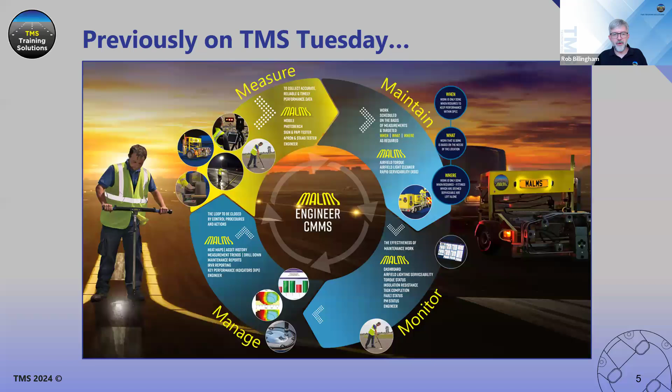Okay, so today, and last time we looked at a lot of the aspects of a CMMS, from runway testing, PMs, maintenance, all that sort of thing. Today we're going to focus on the workshop system and how the CMMS helps there, and how we track assets through from the runway through the workshop system, and how we manage assets and stock levels and repairs and things like that.

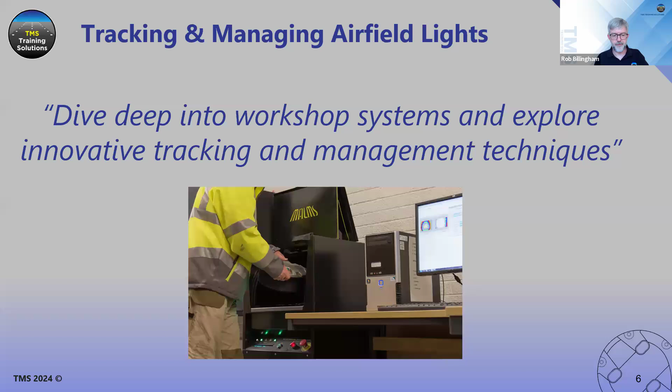Okay, so we're going to look at tagging and warranties. All assets have a warranty period, and that needs to be managed. We also look at the data we collect to determine mean time to failure of assets, and whether they're lasting the expected amount of time. So we need to maximize the efficiency and reliability of our assets. We need to track them with tagging, and we need to monitor our warranties. And then we need to look at stock, all to minimize downtime and ensure a smooth operation of our airfield.

Okay, so how do we identify lights? How do we track them? On the runway itself, one way is to use tags buried in the ground, so we use glass tags. They're called RFID tags, and we bury them about 50 millimeters down under the tarmac.

Usually we decide on a particular side of the asset to place them, and we'd like to put them all on the same side as we go along down the runway. We usually recommend placing them at 75 millimeters from the asset itself, and burying them at 50 mil deep. That is fine for reading with our wand reader and our torque wrench.

So once we've installed the tag, we drill a hole, pop it in the ground, and fill it with resin mortar. We'd use our RFID hand reader to test that the tag is working. Then at some point we'll come along with a tablet PC and a reader, and we'll associate all of those assets into the system. So the RFID tags and the locations all go into the database.

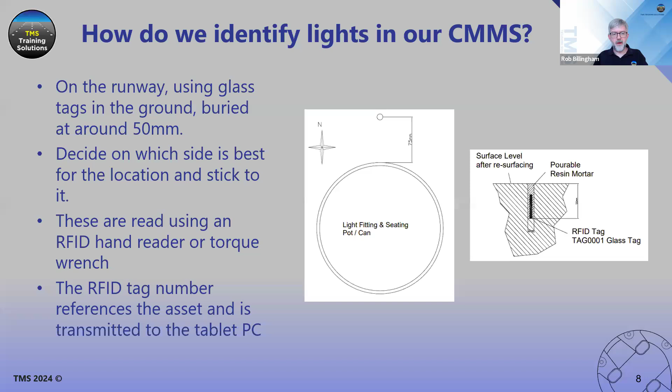As an alternative to RFID tags, we could use GPS, which has its own advantages and disadvantages. Global positioning systems have been around for quite some time; we all know it from our sat navs. Here we're using GPS on a tablet or maybe a phone running an app, and it gives us an accuracy of about 4.9 meters, or 16 feet.

The downside is it can be blocked by buildings, though that's not usually a problem in the airfield because it's a nice open space. You can have problems with atmospheric conditions, so thunderstorms and things can cause issues, and also the design and quality of the receiver itself. If it's a cheap phone or tablet PC, it may not have as good a receiver, which can mean the 4.9 meters is a lot further out.

And it's often the case with runway lights that, especially inset fittings close to taxiway junctions, lead-ons and lead-offs, where lights are closer together than 4.9 meters, just using GPS alone would not identify which one we're standing by.

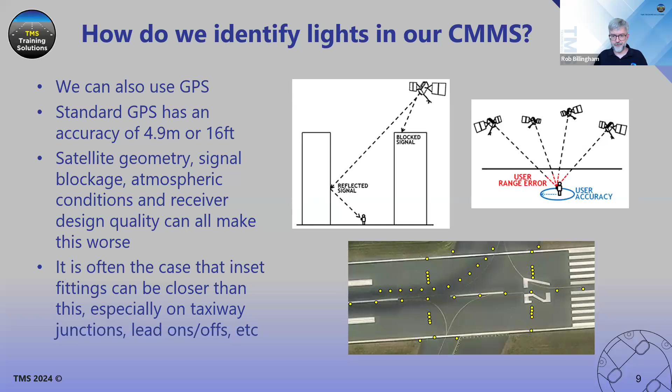So we have an improvement to that, something called RTK, real-time kinematics. This can give us centimeter accuracy, and this is a new development for us. What you have is a base station somewhere on the airfield, which is a surveyed location, so we know its exact position. It's connected to the internet.

Then you have your device in the field, your tablet PC, connecting to GPS as it does normally, also connecting to this base station over the internet. It's a secure private connection just for your airport, your base station. No one else can use it.

The RTK modules in the field are called rovers, so it could be in a vehicle or connected to a tablet PC with an engineer walking around. And we get a correction from the base station, so that corrects the GPS from the satellites down to centimeter accuracy.

It knows exactly where you are on the runway with triangulation, and it corrects that GPS signal. So that could pinpoint which light we're actually standing by, but there still are advantages to actually having a physical tag in the runway too, as it categorically identifies which lamp we are at.

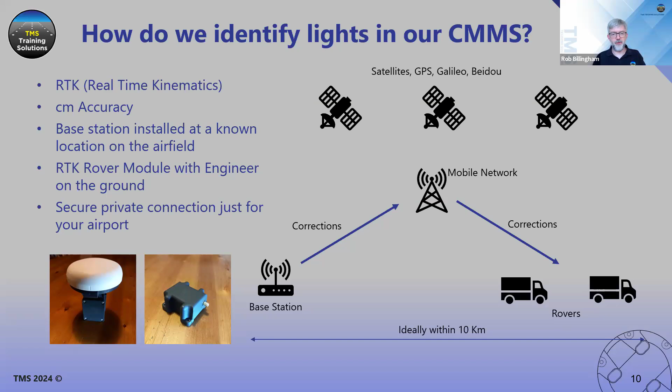Our workshop testers have an RFID scanner mounted inside them, so when you come to do a test, you simply have to scan the tag. The system knows exactly which fitting you're testing. You don't need to enter a serial number or look through drop-down boxes on the software. The software will know which lamp you're testing and what the setup of that lamp should be, whether it's a red-white or a red-red, and it knows all the parameters we need to test against. So it speeds up testing and accurately tracks the fitting through our system.

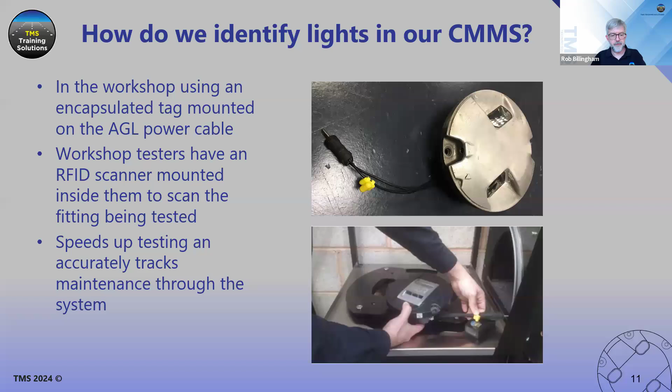But the problem with QR codes or barcodes is they could become damaged over time and unreadable. So fitting the RFID tag to the cable does have a huge advantage.

When we first commission our CMMS, we need a lot of information about the assets themselves, including where they are. This information is usually specified to whoever's commissioned, whichever company's commissioned the system, and the information could be taken from an existing airport asset management system. So it may be just a dump of assets from that system.

Assets are generally split up into areas and zones, so at this time we group the assets into areas and zones. An asset needs to have a photometric type - what sort of light should be at this location. The can itself has specifications, what size light can fit in it, what bolts the fitting itself has for torquing.

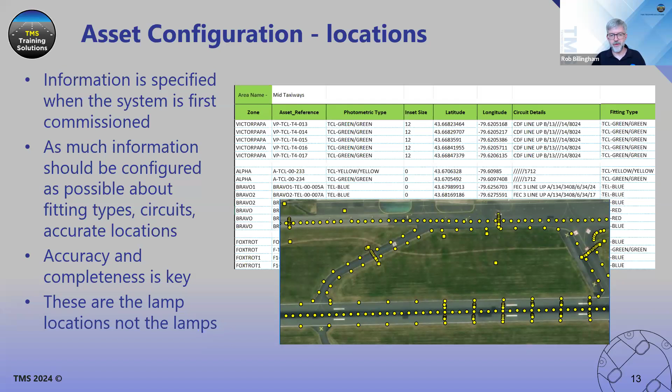Then the lamps themselves, in the workshop system. All lamps have a manufacturer and a fitting type. Is it a centerline light? Is it a taxiway, TDZ?

During commissioning of the system, we need to set up all of this information along with a lot of parameters about this lamp type, which usually come from the manufacturer specifications and documentation. Things like the elevation, the azimuth we'd expect to find when we test them, and what error values we can allow within those parameters. Fitting height, beam width, and of course the all-important candela. What's the standard we're expecting if we test this fitting in the workshop tester?

So all this information, when we configure individual fittings, we specify the manufacturer, fitting type, serial number, then the all-important RFID tag. We should know that, so the tag is fitted on the cable. The color of the lamp, is it white, red?

Then we could look at warranty information. This may be important later if we're looking at mean time to failure. The warranty might be that when you buy the fittings, they're in their boxes and their warranty is running down on the shelf, and you've got 3 years warranty. Or it might be that the manufacturer allows you to have a warranty from the day you first use them. So we need to record that within our system - a first use date and that warranty period, 2 years, 3 years - then we can use that to figure out the date of expiry.

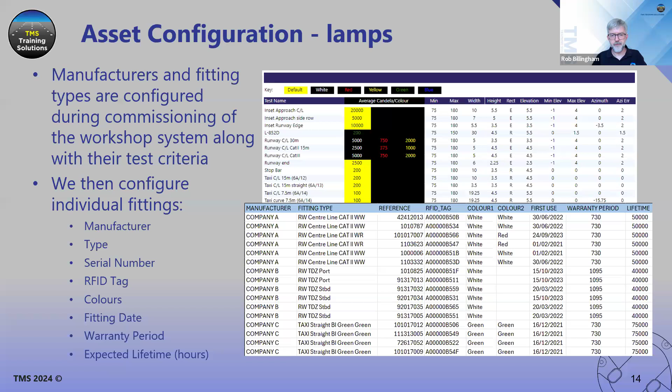So data quality is crucial. Data quality is an assessment of whether the data is fit for purpose in the particular context we're using it. If we want to perform some analytics or AI, we must have good data to start with.

All of that configuration data must be correct and complete. It's no good just saying manufacturer unknown, we'll fill it in later. We need to put all these details in from the beginning, so we start collecting a good amount of quality data. In the future we're going to want to analyze that data, and if we run it through AI, it's got to be good from the beginning. There's an old saying in computing going back to the 50s or 60s: garbage in, garbage out. So what you put in has got to be right if you're expecting decent results out of the system.

So there are 5 traits with the data that apply. It's got to be accurate - all those lat longs must be correct, your test criteria must be correct as documented, all those parameters must be set up correctly. It must be complete - you can't fill in some of it later and leave the rest blank.

Reliability - does it contradict other sources of information, such as the airport's asset management system or GIS system? And is all the data relevant? If you're given a survey to complete, yes it's all relevant, you've been asked for it, but maybe your asset IDs are 20 characters long - do they need to be? Is all of the information in that field actually needed, or are you overcomplicating it?

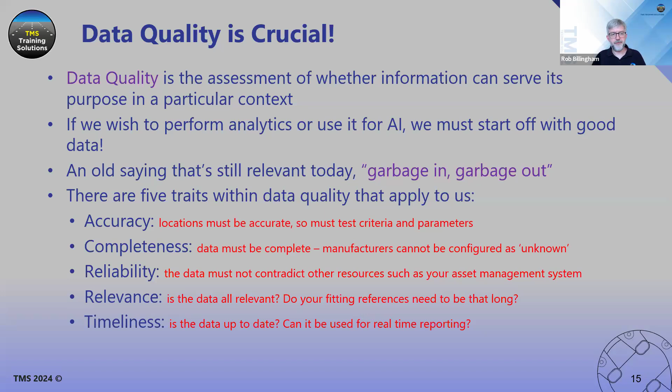Okay, so let's talk about tracking lamps through the workshop system. We've already talked about the location of fittings on the runway. The lamps themselves are either in one of 3 places: actually fitted in the runway, in stock on the shelf waiting to go out if needed, or in the workshop being repaired.

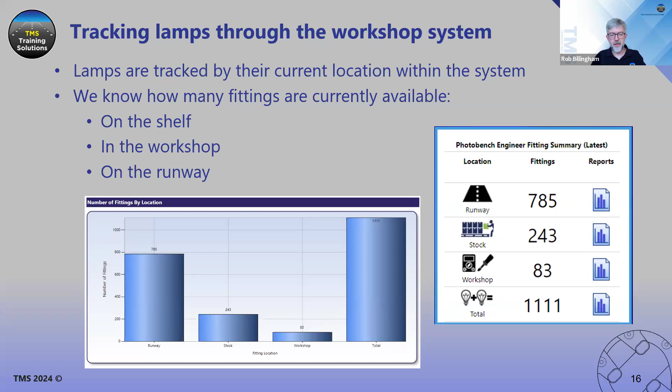If they're in the workshop being repaired, we'd like to get them repaired as quickly as possible and onto the shelf so they're useful in case they're needed. On our dashboard, we can have a panel where we track how many we've got in stock at each of these locations, producing a simple bar chart of where things are. If we click on one of those bars, we can drill down into that location and see by fitting type how many we've got.

So how many AGL headlights are on the shelf or in the workshop? It's all information we need to know, and we know that information because we track it through the workshop system and the MALMS Engineer system using the RFID tags.

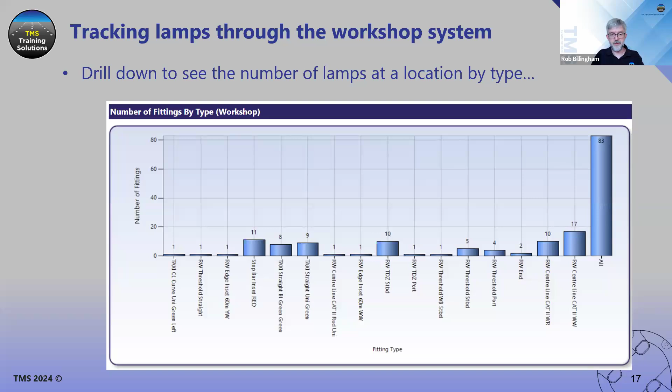So how do we track this? To figure out where a light is, we need to use both tags. If it's in the runway, we scan the fitting and we scan the location, and they're paired together, so we can track it and know where it is in the runway, and what area and zone within MALMS Engineer it exists in.

If it's in stock, it's for one of two reasons: it's come back out of the runway for some reason and been placed into stock, or it's been repaired and placed into stock. If something comes out of the runway, it goes into stock, but then it's quickly moved into the workshop if it's got a problem, where it's tested, and we can use that test result to analyze the issues. So it's important to test as soon as it's removed from the runway.

So this report here is an audit of a single fitting, and we're looking at its history. It starts by being removed from the runway, so it's in stock. It goes into the workshop, it's had a test on one side, then that's fine, so we move it back into stock. Then we install it on the runway, and sometime later its LED driver fails.

So we're back into the workshop again. We tested it to prove that's the issue, we've done some remedial work, and that's been recorded as to what we've done to it. Back into stock again, and then back out onto the runway.

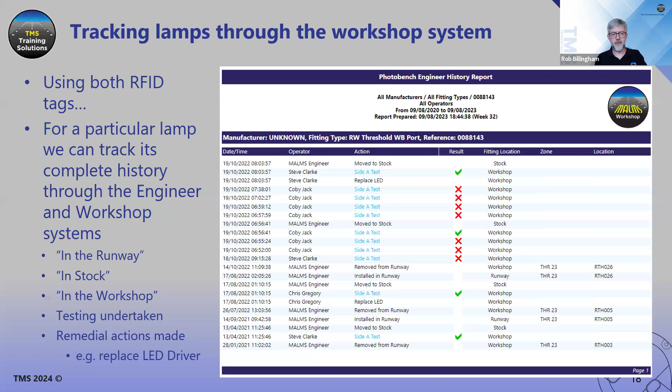Okay, so let's look at the best practices for documenting maintenance to give us that accountability and traceability.

So how do we remove a fitting from the runway then? We're going to use MALMS Engineer for that. We know where the fault is because it's marked on the map. We locate the fitting, drive there, and we scan the tag of the fitting at the location.

Then we select Do Action. This is within the MALMS Engineer tablet software. We select Replace AGL, we fetch that fitting out. Then that fitting, as far as the system is concerned, is gone into stock for now. Then we can replace it with one that we know is good, which we just brought with us.

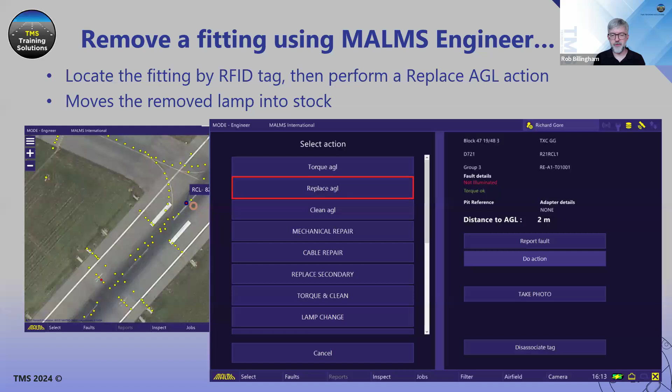As I said, when things come into the workshop, we must always test them initially. So we're going to test twice: before and after repair, and maybe during if we've got an ongoing issue and we need another test in between to help us.

So all the tests we do on a particular fitting are audited, and we can search this audit by fitting type or by date, and we can see who's done the work and the reasons for failure or the reason for pass.

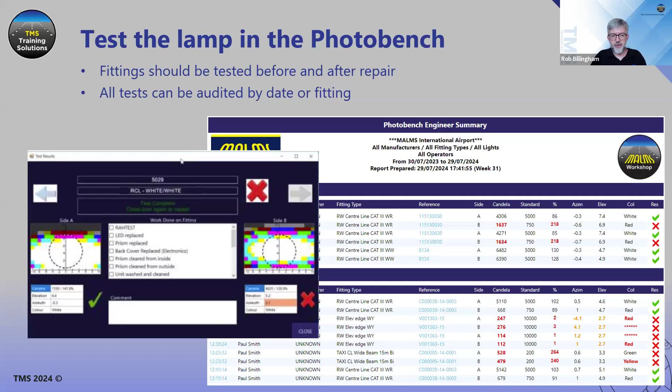In the workshop tester software itself, we get some Isocandela pictures, and we've got the ability there to record any remedial work that's done. We can tick whether the LED's been replaced, or the prism, or the cable, or the unit's been aligned or cleaned. We can record what action's been taken. We can also make some comment in a freeform entry box, and all of this information comes through into the dashboard reporting.

So we've done our test. Isocandela diagrams are a tool we have to help us diagnose the issue. In webinar 42, we went into this in some detail for photometric testing, and it's exactly the same for the photo bench. The diagrams are in far more detail, at much higher resolution, but we've got all the same tools there to analyse the Isocandelas.

We can add guides to the images. We can enhance them, we can change them so we can enhance the darker areas.

So this particular fitting we're looking at, the actual LED driver, the actual LED itself could well be upside down on the B side, because you've got all the light pointing up to the top. We're expecting the light to fill the circle or the ellipse as it is on other fittings, so we can see the alignment is out in this case. So that's a fail, and we've got a figure there, the elevation achieved.

We've also failed on candela as well, on intensity, because the brightest part of the beam isn't within the ellipse.

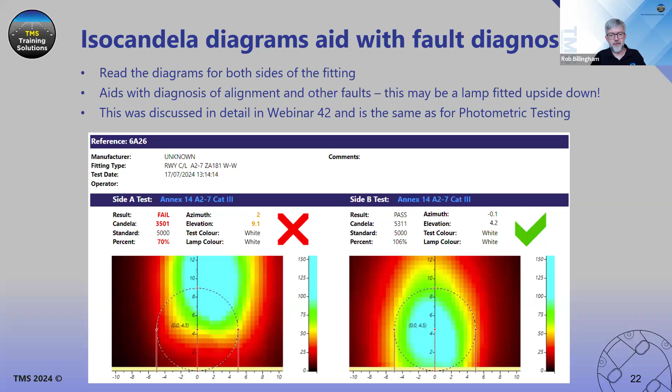Remedial actions taken during repair are recorded during our testing, and come into the PhotoBench Engineer software and through to the database, where we can make additional comments. In the dashboard reporting, we can then track how many actions have been taken, how many fittings have needed a replacement prism, how many have needed cleaning, how many have been scrapped and had an entirely new fitting.

We can track faults and look for epidemic failure, or ongoing issues with a particular type of fitting. All of these reports can be filtered by manufacturer and type, so we can look for patterns of ongoing failure and address those.

It's also possible to interface the system with the stock management system, so we can track the spare parts you're using - how many prisms you've got in stock, how many cables, how many LED drivers. So you know when you've got to order new parts, and you can keep the workshop running smoothly.

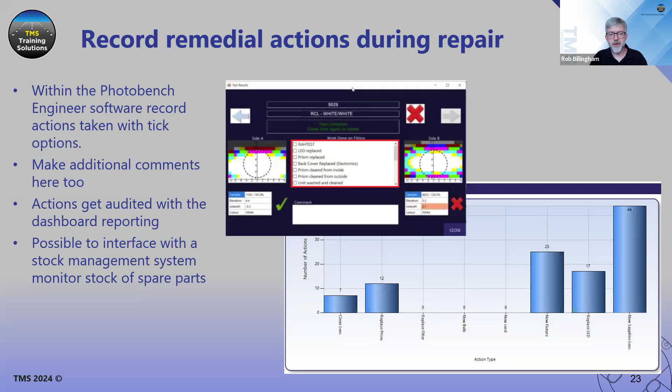So we fixed our light and done the remedial work needed. Both sides should be good, so we'll get it back in the tester now, and once we had a pass on both sides, the unit is returned into stock by the system.

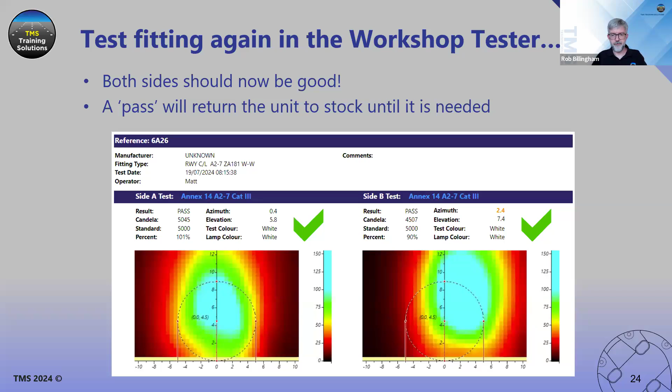Then, to put that back into the field when it's needed, we'd go out to a location where we need to change a light. This may not be the location where it was in the first place - it can be put anywhere you like, as long as it's the correct location for that type of fitting.

You'd scan the RFID tag, perform another replace AGL action, then scan the encapsulated tag on the lamp itself so the system can identify which fitting you're putting in there. It moves the removed lamp back into stock and the repaired lamp back onto the runway.

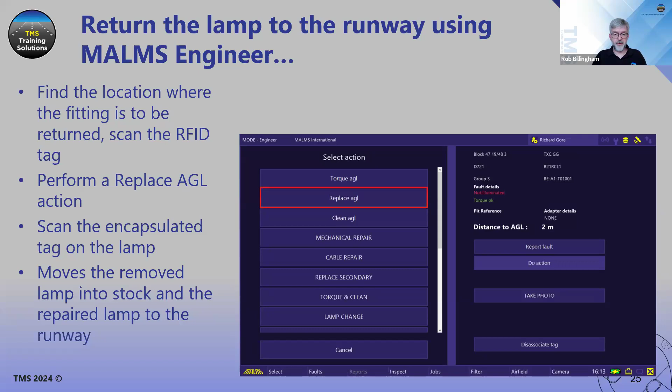Within our dashboard reporting, we saw last time a lot of different maps you can produce for tracking things. This particular map is useful - we can look for ongoing faults in a particular location.

If we show the number of replace AGL actions taking place at different locations, the darker circles show where there have been frequent changes - we could have a possible circuit issue or an issue in the CAN, something geographical. It's something you wouldn't see from tabular data or just a list of faults.

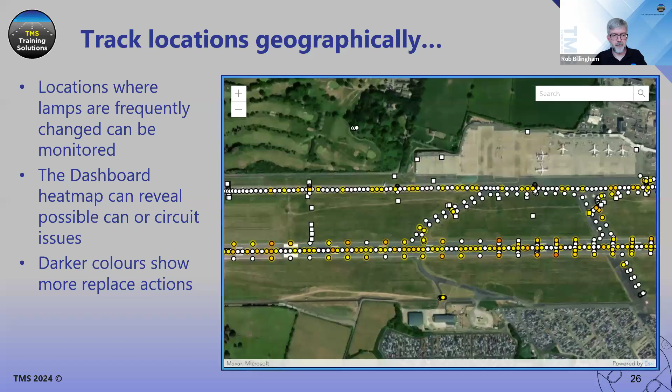Next, stay ahead of maintenance schedules with a visual indicator system to track time to failure.

Mean time to failure and mean time to repair - as I said before, we can track these metrics from all the data that's come into the system, all those repair actions and tests, tracking it in and out of the runway, into stock and back into the workshop. We can look at how long it's been in the workshop and how long it's been on the runway.

On our top level dashboard, we can show these figures by manufacturer. I've just put them on each of these here because I don't want to discuss any individual manufacturers, but it does allow you, the airport, to create these figures, and gives you the ability to work with manufacturers to improve the standard of the product you're receiving. If you feed back to them the issues you're having, they can work with you to solve those problems.

If we click on one of those manufacturers, we can drill down into the fitting types, and look at the mean time to failure and mean time to repair for each different fitting type, and look for any particular issues we think are going on here. If we've got very low figures for a particular type of fitting, then we need to investigate further.

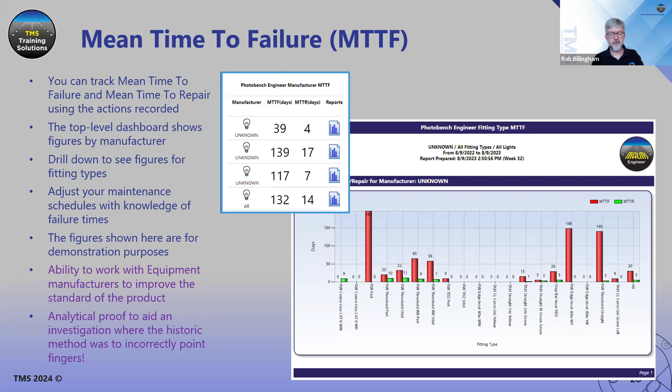We drill down from that chart into some tabular data about the individual fittings. We can look at the manufacturer, the fitting type, and the warranty period. So we know when these fittings were first used, and how long they should last in days, which gives us an expiry date.

We also know the lifetime in hours, and maybe from the control system we might know the number of hours it has actually been running for, and whether they're running at 100% or 50% capacity.

So if the lamp is to fail within an acceptable period, we show that in green, and that's a good figure. That's good news, because we can use that information to plan our preventative maintenance, and we know how long these fittings should last.

If we've got an amber fitting, that means it's past its warranty period, so we can't go back to the manufacturer this time, but it's lower than its expected lifetime. It hasn't lasted as many hours as specified for whatever reason. We may need to investigate that.

And then in red, we'll mark anything which has failed within its warranty period, so that we can take this up with the manufacturer for more help and information.

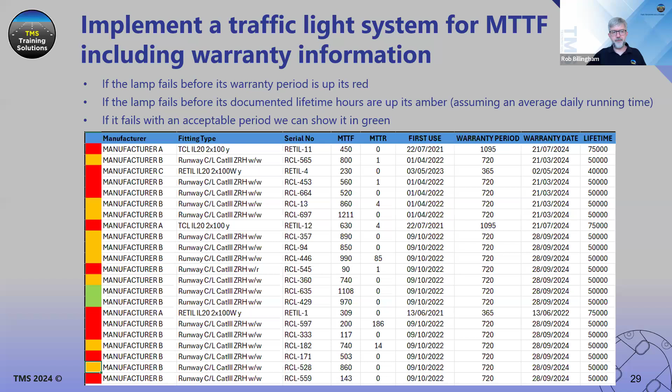So let's look at a real world example of how the workshop can help us on the airfield. We're going to look at something called rapid serviceability, or RSS as we call it.

This is all about you doing a photometric survey, and you've got those results on your dashboard, but something has failed. You've got an adjacent failure on a center line or an edge, and that red cross is going to be there for a whole month until you survey again. So you get your next closure and you can take the trailer down again.

Okay, so you may have fixed the issue with MALMS Engineer, but the problem is still showing in your serviceability. So RSS gives you the opportunity to correct that based on the results from the workshop tester.

So you can test a fitting that's in stock in the workshop tester before it comes out into the field, prove it's good, put it in the ground, and then the results from the workshop tester are substituted into your photometric results until the time of your next photometric test.

So using MALMS Engineer, you record the fact that you've put that light in the ground and where it is. The dashboard reporting is updated with the result from the workshop.

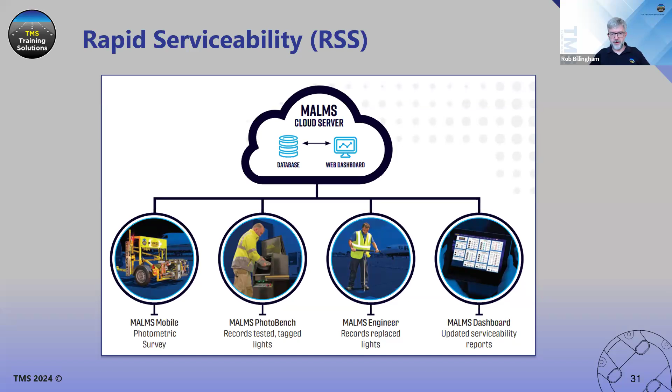So some conditions to this: the lights must have been tested in the photo bench within the last 12 months. That's the best before date on the test. And because we know what date it was tested, we can reject that fitting at the point of installation in the engineer software.

We can't support elevated fittings with this system because of their nature. With the elevation and azimuth, we can't guarantee that they're put into their locations accurately and aligned correctly, so the result doesn't reflect what it was in the photo bench.

So inset only. The isocandela diagrams don't come across from the workshop because they're much higher resolution than the photometric ones. So at the moment, we just bring across the intensity results, in candelas.

We assume that you put the fitting in the right way around, so it's pointing the right way. And if you do put it in the wrong way around, we hope that would be picked up on a visual inspection at some point. So we assume that you put it in right and the result can come across.

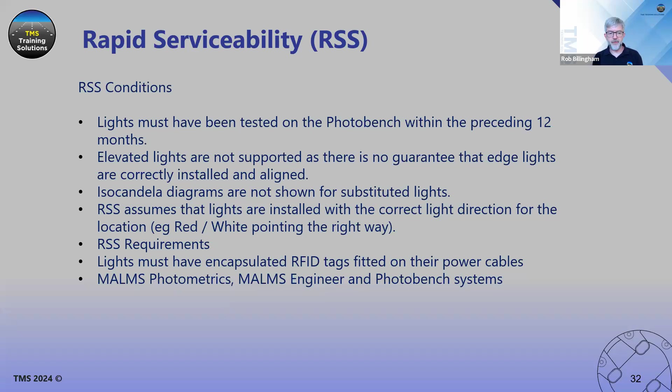In order to use RSS, you must have MALMS photometrics, you must have a trailer, you must have an engineer system, and you must have a photo bench to do that testing. And you must have fitted all of your lamps with encapsulated tags so they can be tracked.

So if you've got a light that's out or it's failed its photometric test - sad face - we can replace this with the MALMS engineer software, as we've seen earlier on. So then we scan the tag of the new fitting that's installed, and we're all happy and working.

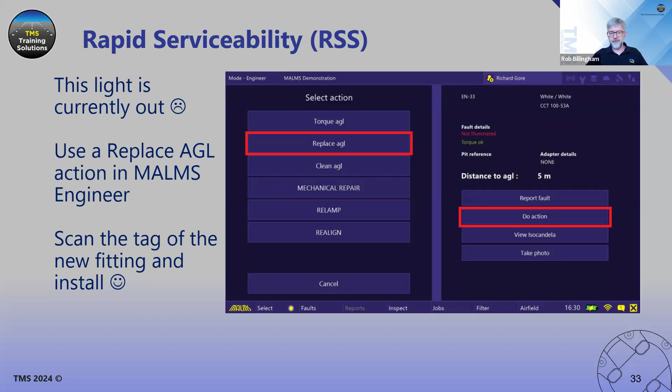And then, as I said, when you do your next real photometric test with the trailer, hopefully they test out good and the results are replaced with real ones.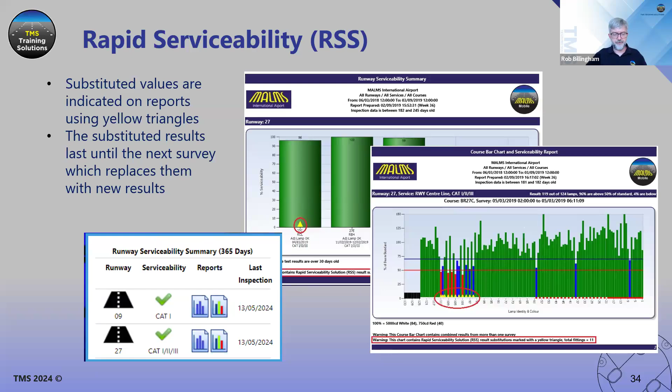Okay, so that's all from me. I'd like to go back to the panel now and we'll look at questions.

Okay, then. Well, thank you very much, Rob. That was really interesting and informative, and I'd like to thank you, as the participants in this might appreciate, attendees may appreciate, a lot of work goes into preparing these presentations and